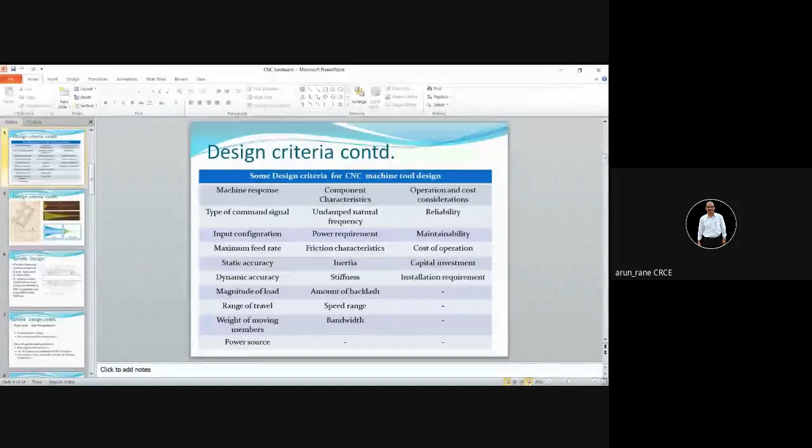So most of the parameters you are aware of, like what is your budget, that is capital investment, reliability, then maintainability - whatever you design should be maintainable. So these are the few parameters which are to be considered when designing a CNC machine tool.

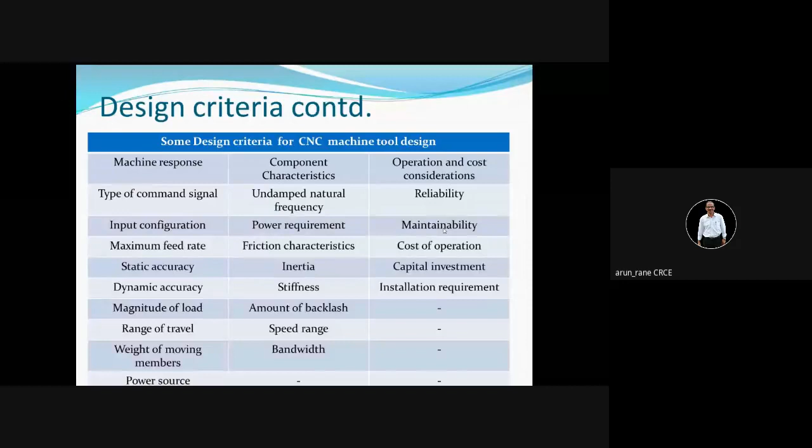Why do we incline the bed? First, it offers good rigidity to the machine tool, and second, disposal of the chips and coolant - they get disposed of very easily. The CNC lathe we have in our college is inclined. Usually the angle of inclination is 30 degrees to the vertical.

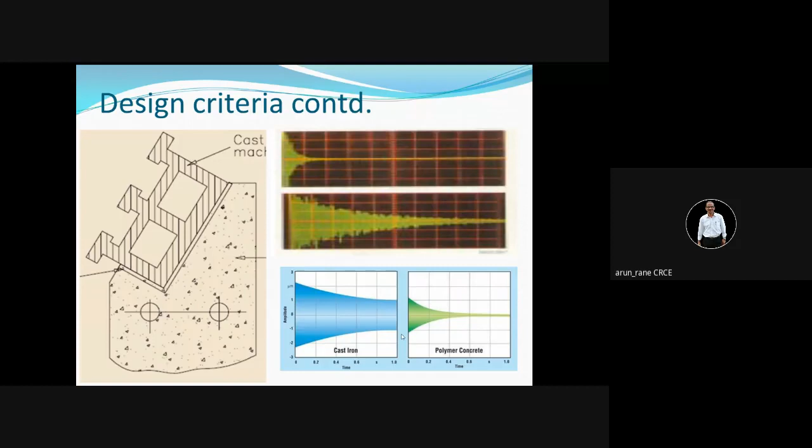Spindle is most important in any CNC machine design, because on the spindle we are holding a component or a job. So the spindle should transmit torque as well as power properly so that the component can be cut easily. Of course, there should not be any vibrations or chatters on the workpiece.

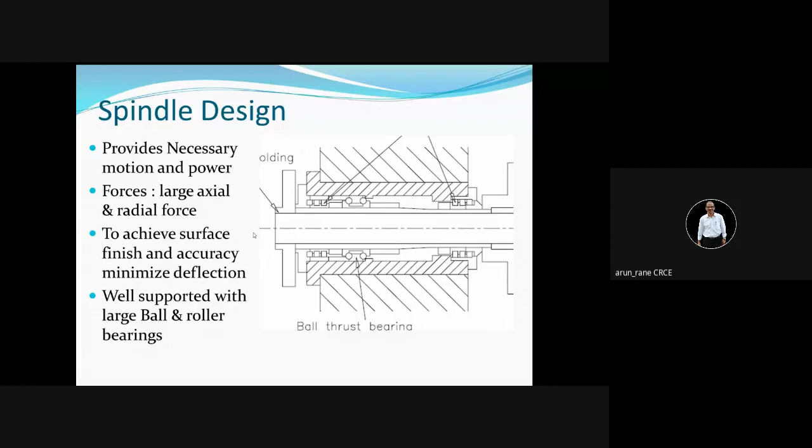If the speeds are very high on the machines, say 10,000 or 15,000 RPM, then a lot of heat is generated. So you have to design, considering all the design parameters, your machine in such a way that heat has to be dissipated. There has to be a proper cooling arrangement, either oil cooling or chilling.

Chilling means water cooling, so you need to have some chillers also outside your CNC machines. Even for oil cooling, you need a chilling unit. So whenever you are purchasing, as a purchase engineer, you have to consider the cost of accessories also, not focus only on the CNC machine. Yes, the CNC machine contributes the major cost, but along with that you have to consider other factors also, like environmental conditions.

The cabin or room should be vibration proof, it should be air conditioned, there should be proper humidity control, then a chilling unit, then a conveying unit. All this has to be considered in the budget, and you have to give the proposal to the management, otherwise your boss may scold you.

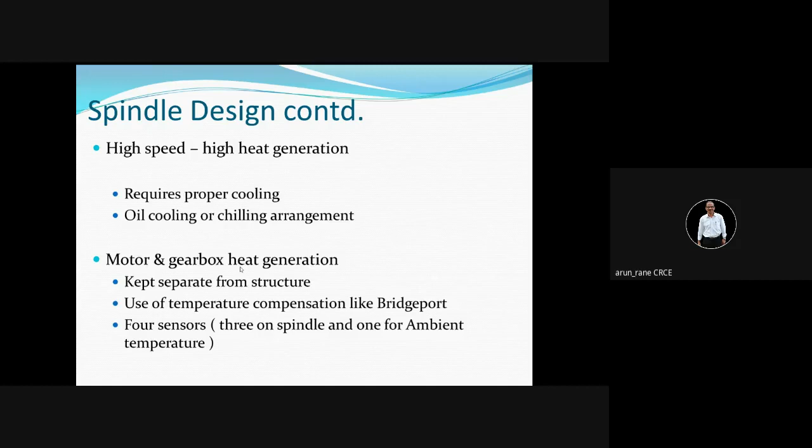Then your motor and gearbox also get heated. The machine we have in our college can reach up to 6,000 RPM. Nowadays, the machines available can reach up to 12,000 or 15,000 RPM; we call these the high speed machines. So heat dissipation is very important.

You should have good quality bearings so that your spindle rotates true, meaning it is not moving eccentrically. If you put a plunger type dial indicator on this surface, it should show zero, or maximum deviation not more than 5 microns. Then only will you get an accuracy of 10 or 20 microns on the workpiece. If your spindle itself is running out, you cannot expect any accuracy on the workpiece.

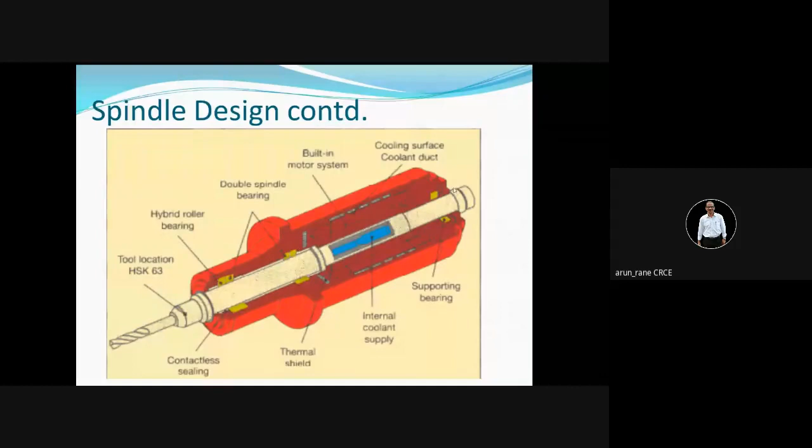This yellow color represents the bearings. Of course, you should have two bearings at the ends and one bearing in the middle. You can have an L frame construction as well as a C frame construction.

The design is not that easy. You have to consider how to cast it too; it should be designed for manufacture. Anybody can design, but it should not be so complicated that it cannot be manufactured at all - that design is of no use. So whatever you design should be designed for manufacturing, designed for assembly, and designed to cost, meaning it should have minimum cost. Then ease of assembly, ease of manufacturing, ease of maintainability.

From a maintenance point of view, your design should be maintenance free, like earlier bearings. I remember we used to receive open kind of bearings, so every 10 days or every week we needed to open the machine and put grease inside the bearing. But nowadays bearings are received in sealed condition, and the bearing manufacturers use good quality grease, put it inside the bearing, and seal it with end shields from both sides - now it is maintenance free, you don't have to put grease.

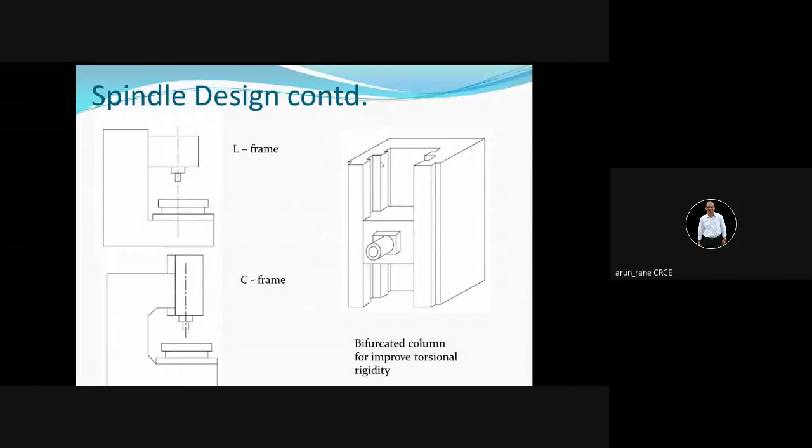There are two types of drives used in CNC machines. One is spindle drive and another is feed drive. The purpose of spindle drive is to give torque to the spindle or the workpiece. In case of lathe, the spindle is rotating. In case of milling, the tool is rotating. So spindle drive means you are rotating your spindle, and the other drive is feed drive, that is axis movement - x-axis, y-axis, and z-axis.

So what are the considerations in spindle drive? Obviously, material removal rate has to be more. Then speed - the beauty of CNC machine is the speeds are infinitely variable. We call it PIV, that is positive infinitely variable.

So in case of CNC machines, you have speeds ranging from 0 to 12,000. Suppose if 12,000 RPM is the capacity, then you can get any speed in between, like suppose 500.23. So any decimal point you can get it. It's not necessary that you will get only integer value.

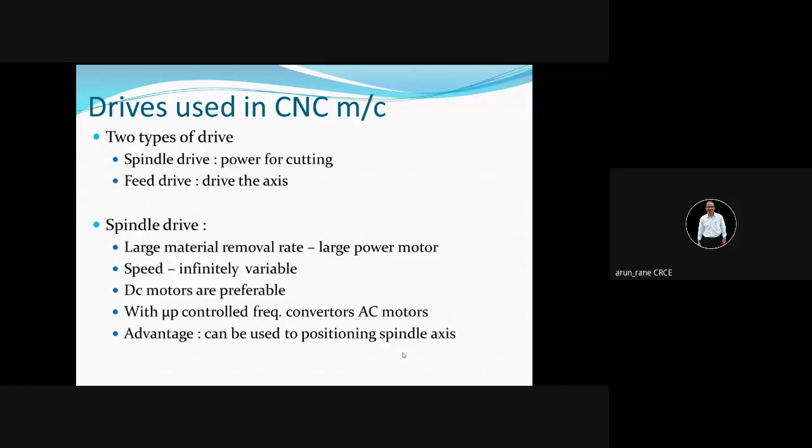So again, different kinds of hardware are used, like DC servo motors, brushless DC servo motors. Like I told you, in AC motors, nowadays it is available without brush. So even DC servo motors are available brushless, and every servo motor has its own advantages.

Like DC servo motors have high performance, useful in prime movers. Prime mover means it gives motion on its own. The response is better, meaning quick response. This is what you study in control engineering.

There is feedback. Like suppose if I want to apply a brake, then you should have an immediate response. The braking distance should be as less as possible, otherwise it is going to hit the person. Suppose all of a sudden a person is crossing the road and you have to stop the car immediately - so the response should be very fast.

Like suppose if a teacher is asking a question, then you should respond in as less time as possible.

Then the advantages of DC servo motors, brushless DC servo motors - heat dissipation and motor inertia reduce, that is the weight of the motor is less. So we call it weight to speed ratio. This is the beauty of design, or the work of design engineering. Earlier we used to go for stepper motors.

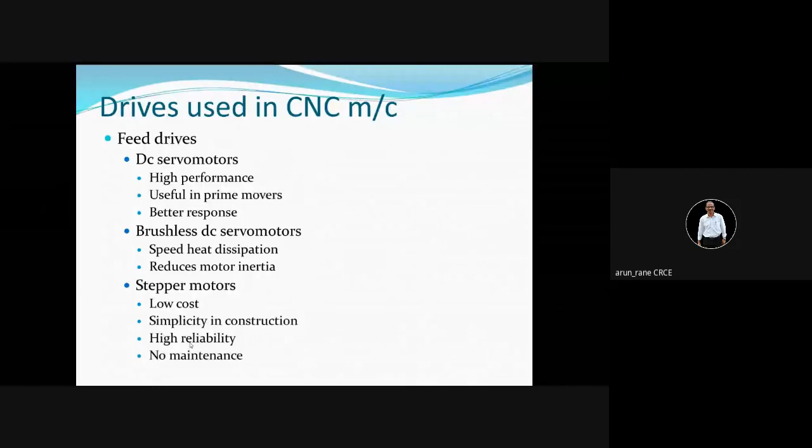My spindle should rotate through 0.05 degree, into 60 that will give you minutes, into again 60 that will give you seconds. So the technology is talking about rotation of the spindle not only through degrees or minutes, but through seconds, which is not possible by stepper motors. So we have to go for servo motors - there is no option. But if you want a low cost solution, then stepper motor is the best.

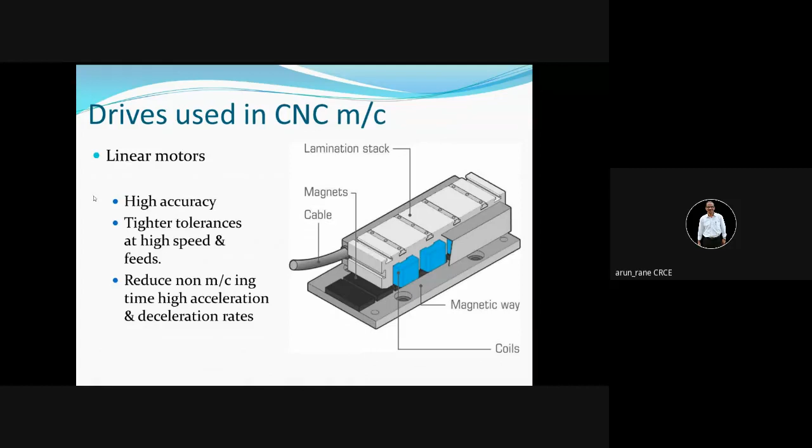Now you may be knowing that motors always mean rotary motion. Not so - you can have linear motors also. Linear motors means the output will be reciprocating. You give electric supply through the cable, and the output side will be a reciprocating motion. That is what linear motors mean.

What are the actuation systems? Actuation system means the motions - what are the hardwares or devices used for getting motions? One is lead screw. Now in case of CNC, we don't use the term lead screw, we use ball screw, because in ball screw you have zero friction.

Slideways - we use linear motion guideways. Linear motion guideways means the slideways, which are the guideways on which your linear or longitudinal movements occur. These slideways are coated with Turcite, a kind of polymer which gives you zero friction. So this offers a stick-free phenomenon - no sticking - with the help of Turcite coatings.

So in case of ball screws, your conventional square threads and acme threads are replaced with a special kind of thread profile in which you have balls, fitted and preloaded, so you get zero friction.

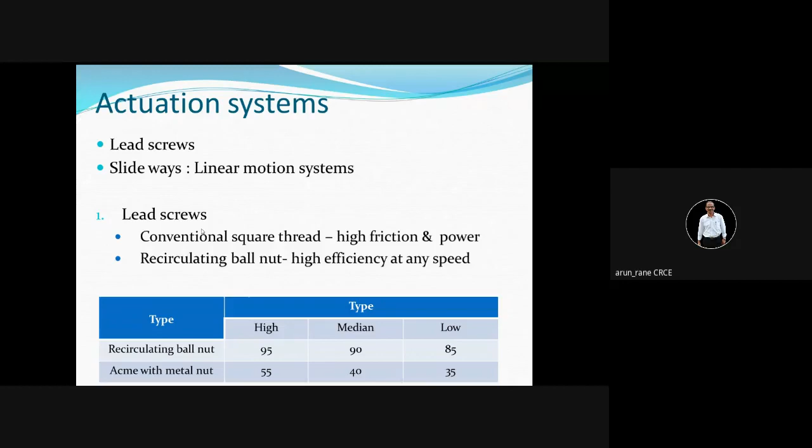How do you do that? Preloading - you apply a force from outside so that the clearance is reduced. If you apply more force, the clearance will be less; still more force, even less. There has to be very little clearance. You cannot have zero clearance, because if there is zero clearance, there will not be any movement at all. So there has to be a very small clearance.

At the same time, you have to see that the clearance is not too much either. If the clearance is much, there will be a play, dugu dugu, and you will not get proper movement or proper positioning. This preloading is factory set - there are special machines, SPMs, for preloading. So before dispatch, they preload the system, that is screw and nut, inspect, take the cuts, and then only dispatch. Generally, we don't do this preloading in house.

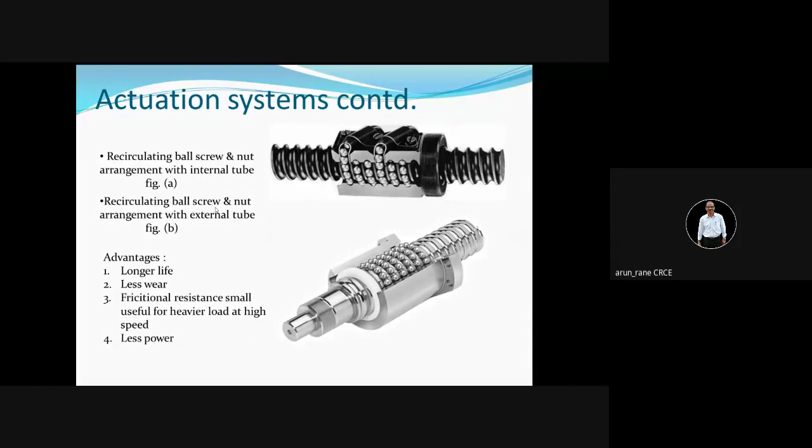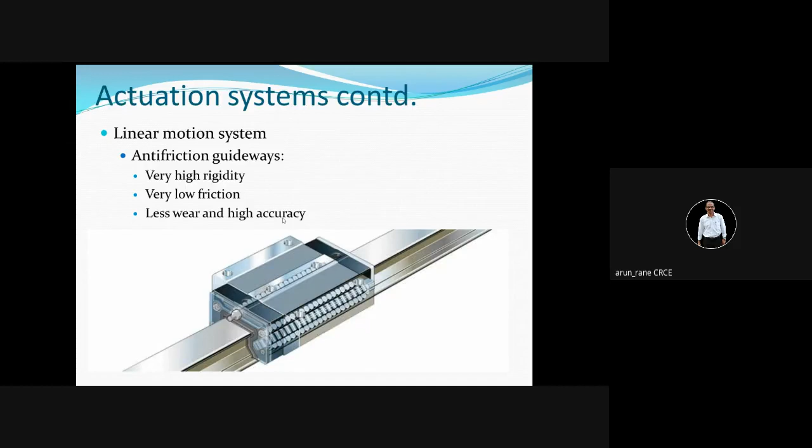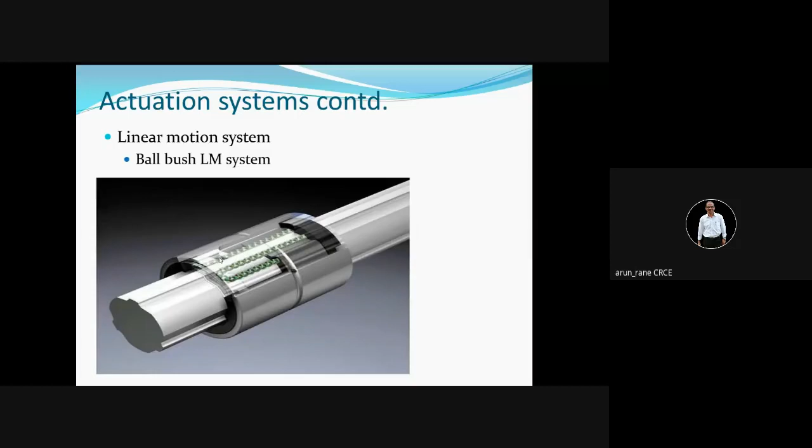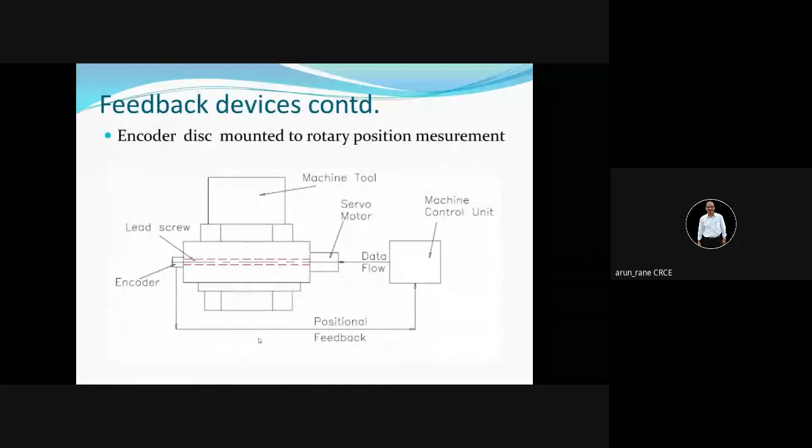Again the same diagram, the previous diagram and this diagram, the encoder is shown here. That's the only difference. But you can draw this diagram in your exam, very simple. And if required, you can draw this diagram also.

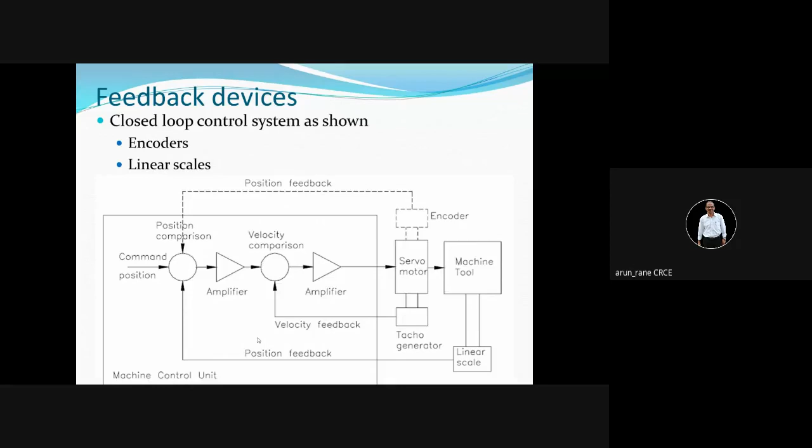There are some more feedback devices like scanning, but we don't use this. These are purely based on interferometer technology. Most of the CNCs, I will say 100% of CNCs, use encoders or tacho generators.

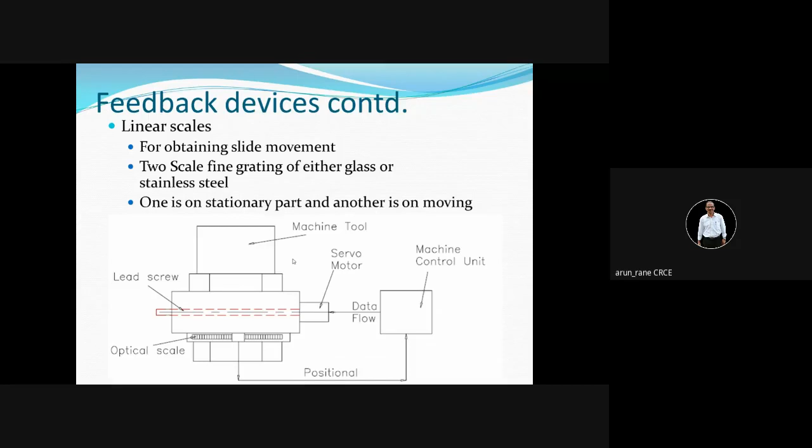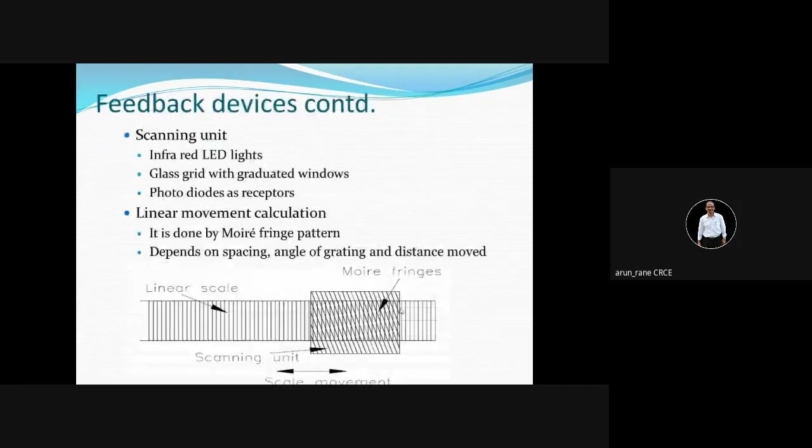If you want, you can refer to this book, P N Rao. Any doubts, please feel free to ask.

Yeah, Sachin. Indrajit. Hello, Indrajit, are you there or not? Yes sir. Any doubt? No doubt sir. None. Sure, yes sir.

Can you see this slide? Hello, Indrajit, can you see this slide? No sir, no, no. Yeah, now, yes sir, Indrajit, yeah, can you read it? CNC Hardware. Good, it is visible, no? Clearly, yeah, yes sir.

So just a continuation, I again uploaded this in the classroom because the weightage for this CNC hardware is 5 marks. So either they will ask on the structure, or on the spindle, or on the encoder, or ball screw. 4 to 5 hardwares you have to study.

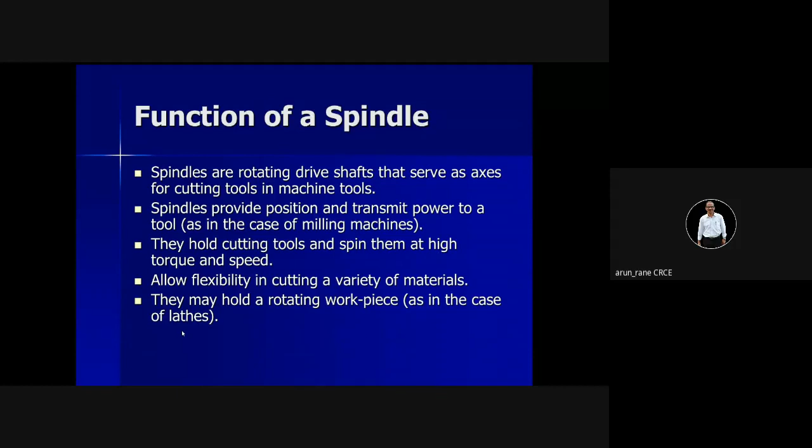So the principle is that it should give good power, should give good torque, should be durable, and you should get good quality, that is, we are talking about 1 micron or half a micron accuracy.

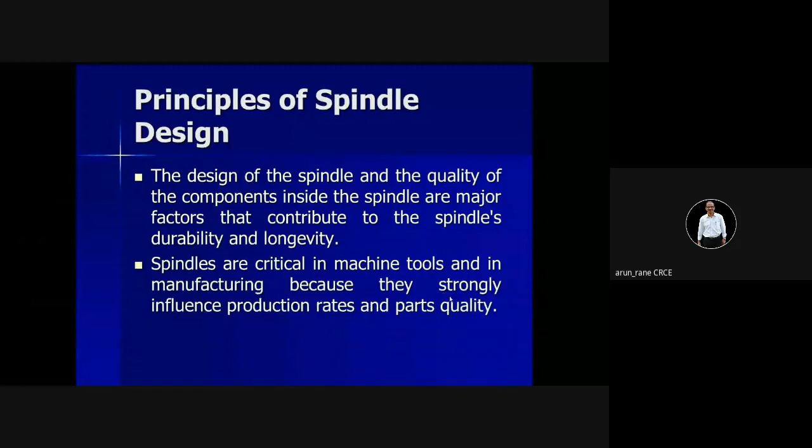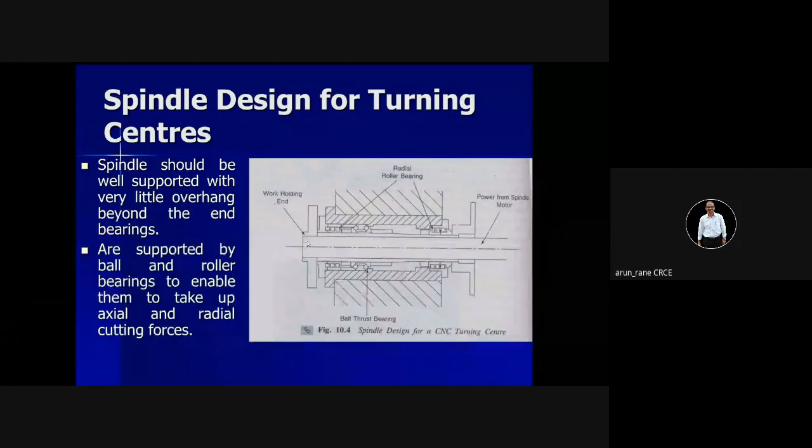HMC stands for horizontal machining center. The difference between machining center and milling is that in milling there is no tool magazine, the number of tools which can be held is only one. Whereas in case of machining center, you have a tool magazine which can hold 20, 40, up to 120 tools. Normally a 40 tool magazine is common in most machining centers.

Machining centers can be horizontal or vertical. Vertical machining center means like your vertical milling machine, where the spindle is vertical. Horizontal machining center means the spindle is horizontal.

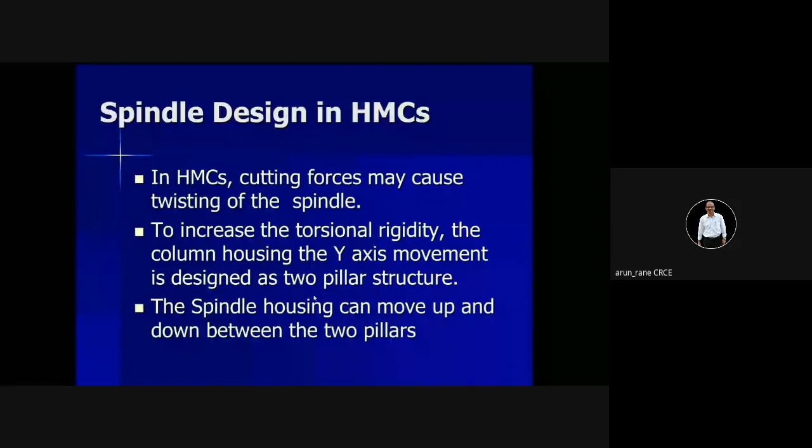See, a two pillar structure will give you good rigidity. If the machine is vibrating, that means it's gone, you will not get any accuracy. Again, if you want to avoid deflection in case of a vertical machining center, then you have to go for a C type construction, which I showed you in the last PPT.

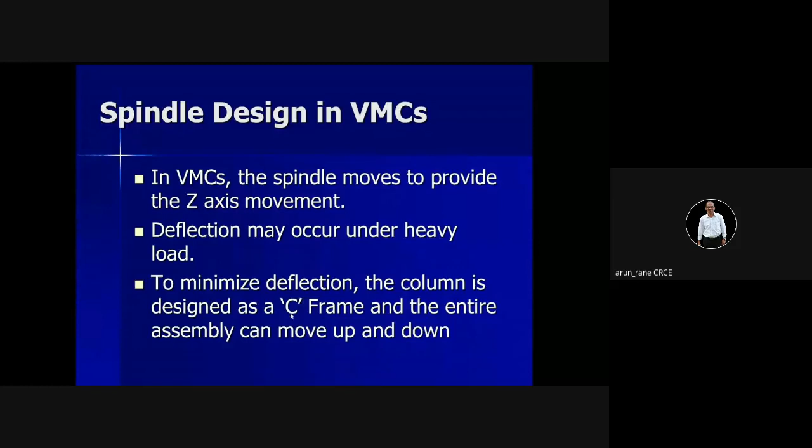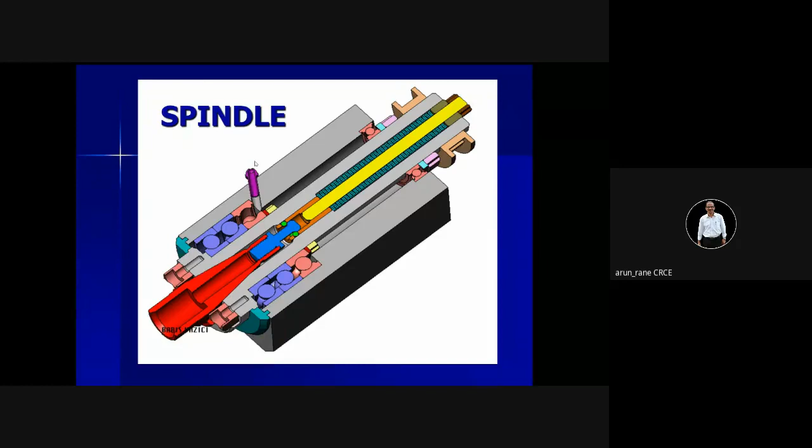So you have to see that chips and coolant don't go inside the spindle. Otherwise it will spoil the spindle. The chips will cut the shields of the bearing and damage the bearing. Once the bearings are damaged, then your spindle will run eccentric or run out. And once the spindle is out, you have to replace the spindle, or the machine accuracy is gone.

Same thing with coolant. If the coolant is going inside the spindle, then for a period this coolant will have a corrosive action on the spindle, so your spindle will get corroded from the inside and again accuracy is lost. So you have to have an air purging system, wipers, a good pressurized system, and a lubrication system. All these are the functions of a CNC design engineer.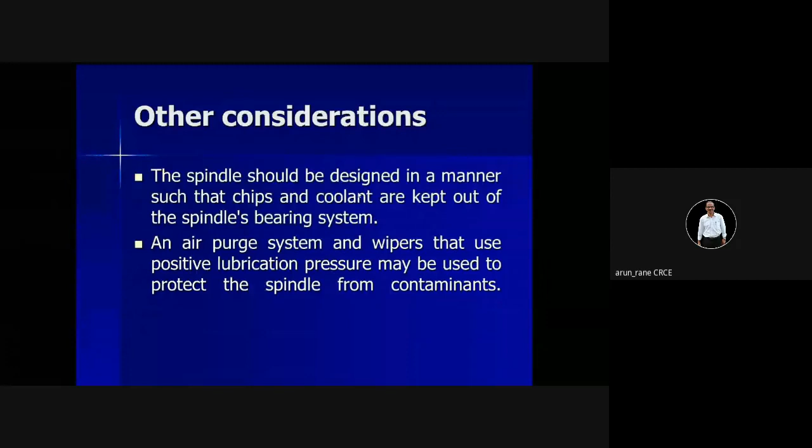Spindles can be classified as belt driven, gear driven, motorized or integral motor - meaning the spindles are directly connected to the motor - and high frequency spindles. Generally here, that is gear driven spindles.

99% of CNCs have gear driven spindles because belts will have slip, will not have proper or good torque, and will not transmit power properly. The only advantage of belt is if the distance between the motor and the spindle is more, then belts are preferable.

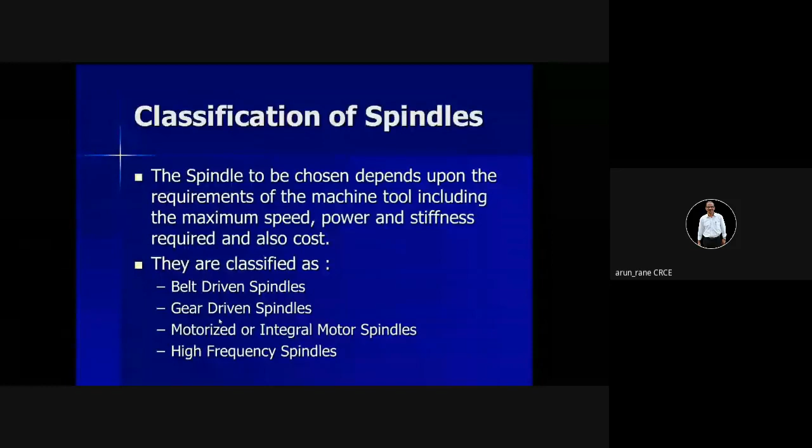But nowadays we maintain the distance in such a way that spindles can be driven by gear, and gears are positively driven - good torque, no slip, good power, etc.

These are some advantages and disadvantages. It is less expensive. Power and rotations can be given with the help of an external motor, meaning the motor can be situated outside. Like I was talking about the slip of the belt, which can be overcome with the help of a cogged belt.

Cogged means having teeth on the belt. Those who are working on the projects must have used this cogged belt. The belt has teeth from the inner side, and the pulley it's mounted on also has teeth. It looks like a gear, but not exactly, because the depth is less. Or you can have V belts also, two V belts or three V belts. Cogged belts are preferred, but definitely in terms of speed, power and torque, geared drive is always preferred.

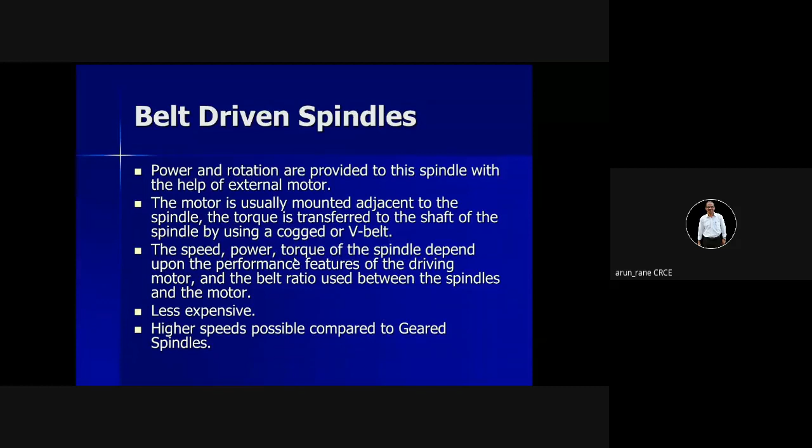Gear drive can give you good, high torque. It is also useful for low speed operations. It is desirable, gives good rigidity, speed variations, and so on.

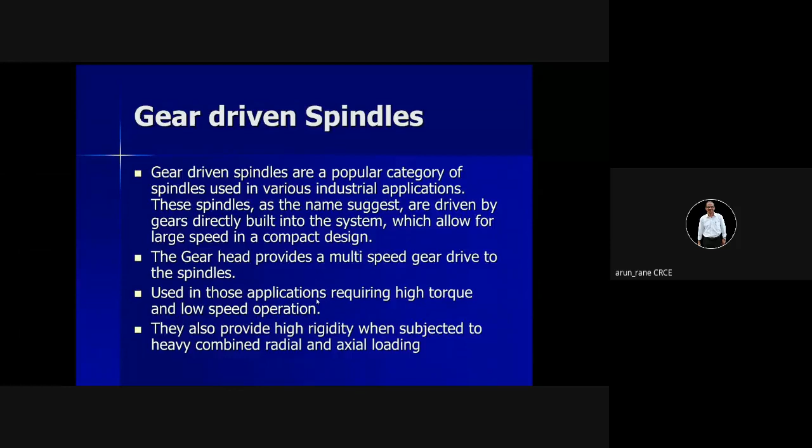Integral spindle motor - like here we have a motor, and the drive is transmitted through the belts to the pulley, and this is your spindle. In case of an integral spindle motor, your spindle is directly mounted on the motor. So there is no transmission loss, very compact, but this design can be used only up to low power applications, maybe up to 2 HP or 3 HP.

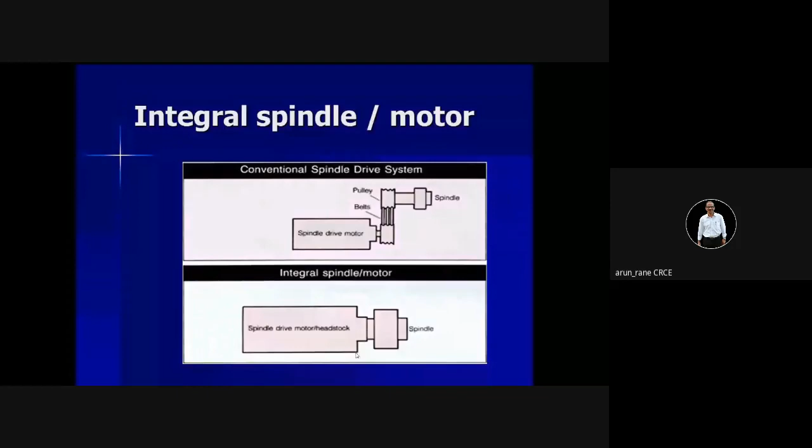So if you want high material removal rates, integral spindle motor design is not applicable. Of course the design is also complicated. From an academic point of view, you can definitely study it if you are curious academically. From an examination point of view, it is not important.

Your spindle is directly mounted inside the motor - that is your integral spindle, or your motor output shaft is designed in such a way that your chuck, that is chuck, or your faceplate can be directly mounted on the motor output shaft in a simple way. This is what your integral spindle means.

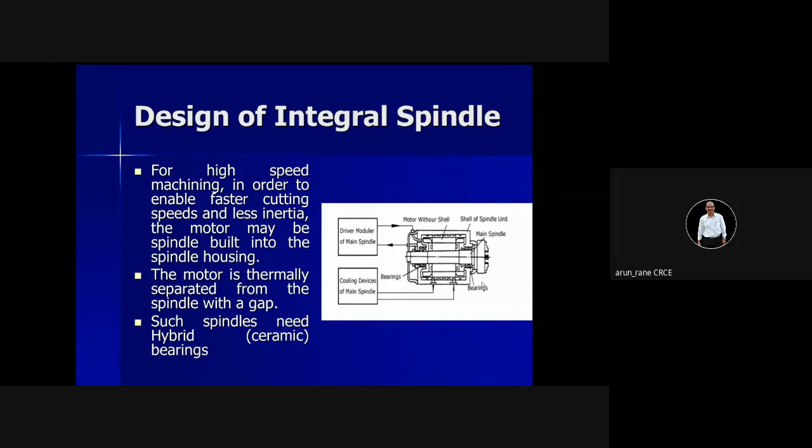High frequency spindles are very common in terms of precision, higher speed, and productivity. Not only that, you also get good surface finish and closer tolerances.

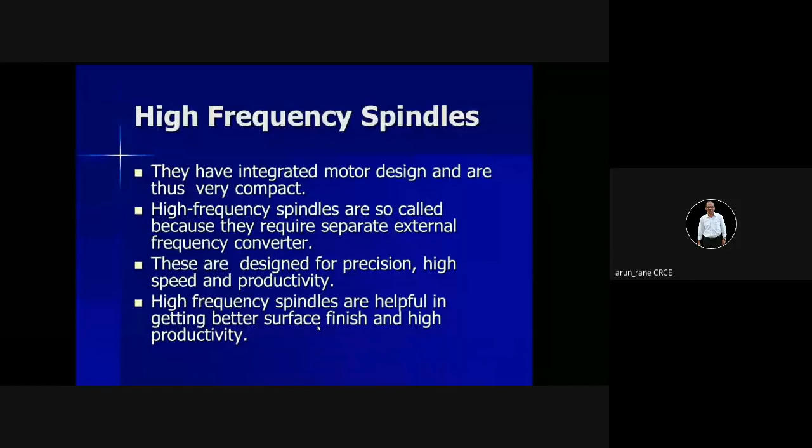As I have been telling again and again, in CNCs the spindle drives, or axis drives, are also called PIV, that is positive infinitely variable. You get any speed in terms of decimals, and that is only possible because of these DC servo motors.

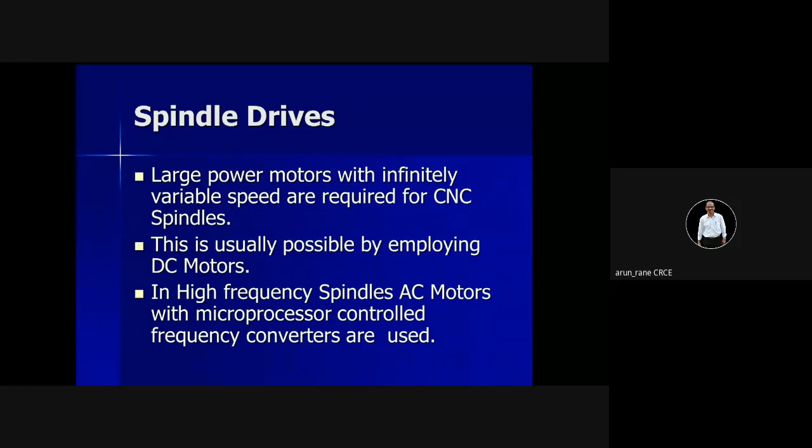In the last presentation we saw that you have to maintain the spindle temperature, so there has to be a good cooling arrangement. At the same time, regarding adaptive control we were talking about, they have a temperature compensation system. So the temperature compensation system means if the temperature of the spindle increases, then it compensates for that rise in temperature. That is what your temperature compensation system is.

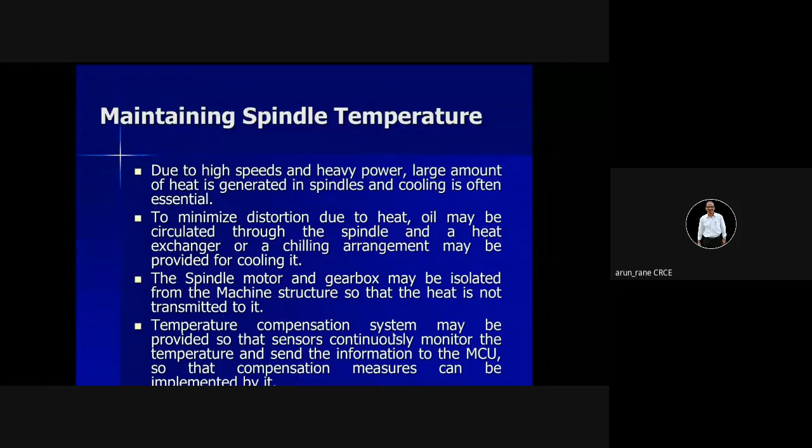So you have different parameters for choosing the spindle: power, load—what is axial load, what is radial load—size, weight, torque, etc.

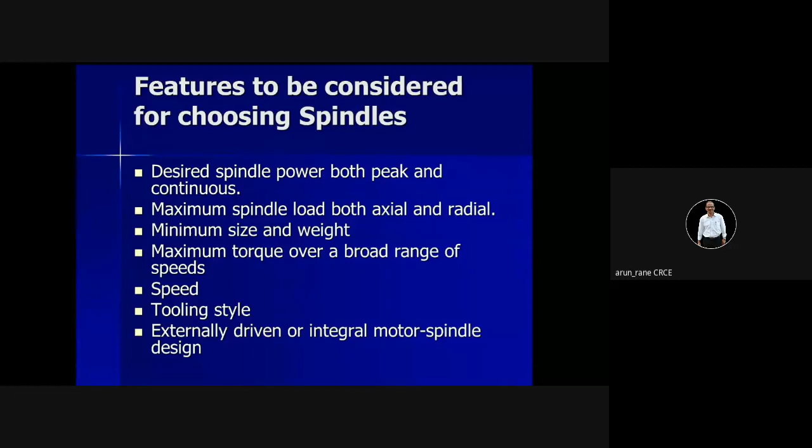To go a little fast because we have to complete this. Then axis drives—it can be spindle drive or axis drive. So clearly it will be asked in the question: describe spindle drive or describe axis drive.

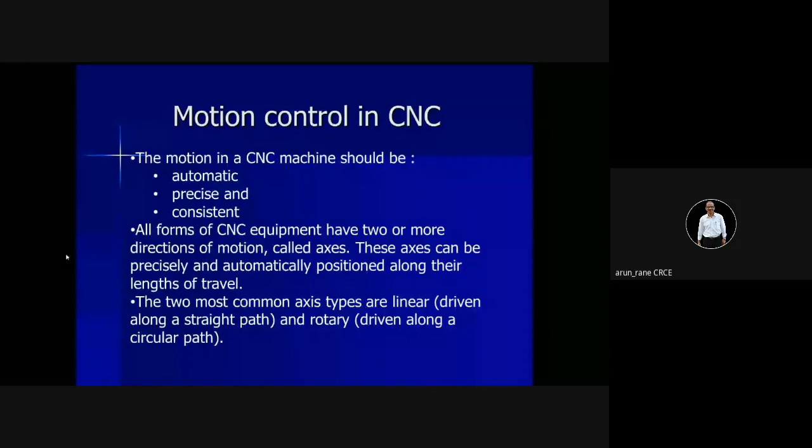So the motion in a CNC can be automatic. It has to be precise and consistent. Precise means it has to stop at that point, and consistent means repeatability—that it should repeat the same position every cycle or continuously, not only once or twice. So repeatability, consistency, or uniformity is very important in motion control.

So you have motors, ball screw, encoders, linear scales, and tacho generator—this is what we have seen already. Never talk about lead screw in CNCs; you have to always speak about ball screw. No lead screw, no rack, no pinion—only ball screw, encoders, and linear scales.

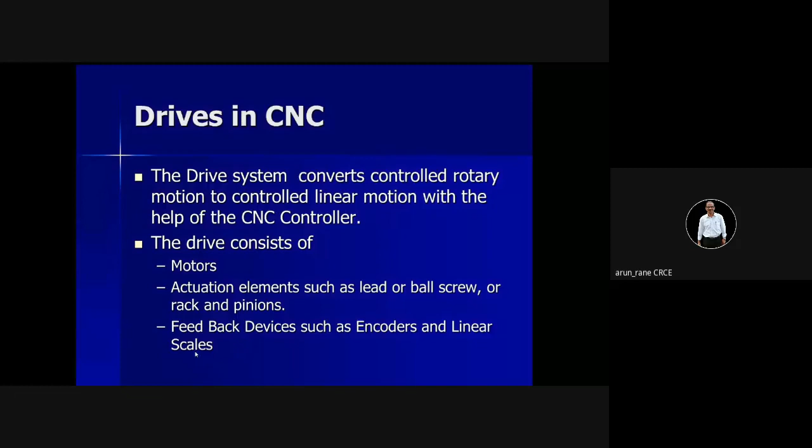Rani: Sir, let us conclude. Can we conclude, sir? Speak loudly, I cannot hear you. Yeah, just give me 2 minutes, 2 or 3 minutes. Fine? Okay, thank you, sir. Just hold on.

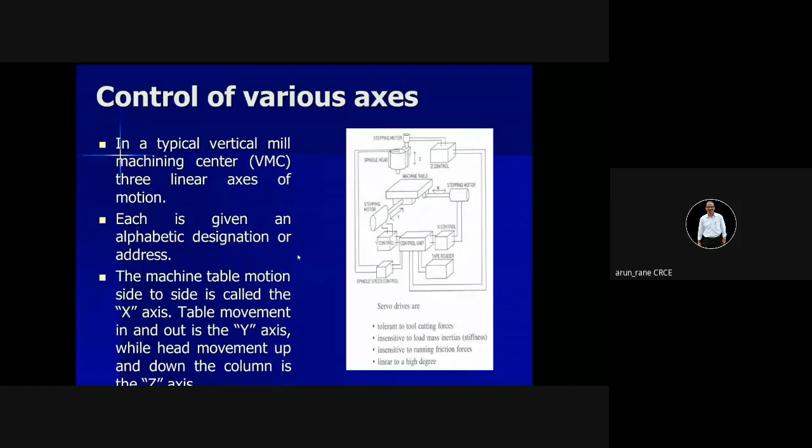You can go through this also, I'll just touch upon it. So you have movements in x-axis, y-axis, and z-axis—that is what is called control of various axes. This I have explained in the last presentation. Additional axis can be the rotary axis. So we have machines up to 7 axes.

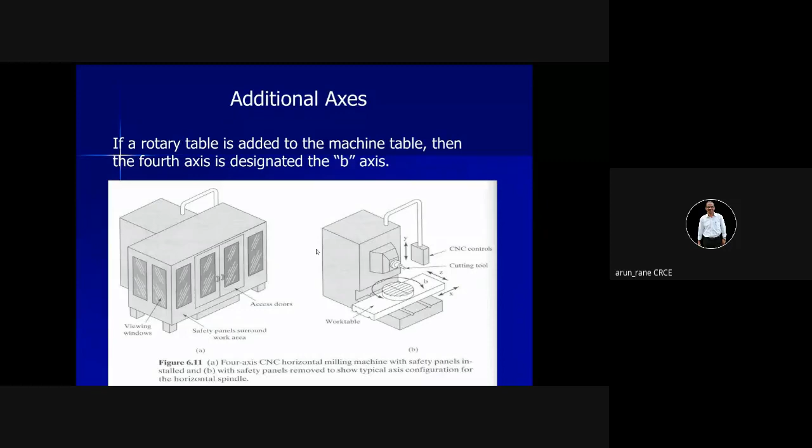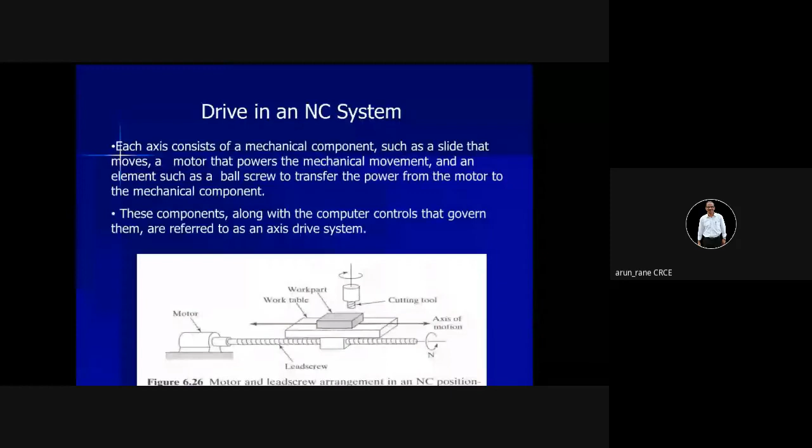And open and closed loops. This is your closed loop. In closed loop, the feedback is given like this, and in open loop there is no feedback. Open loop machines are less costly; closed loop machines are costlier.

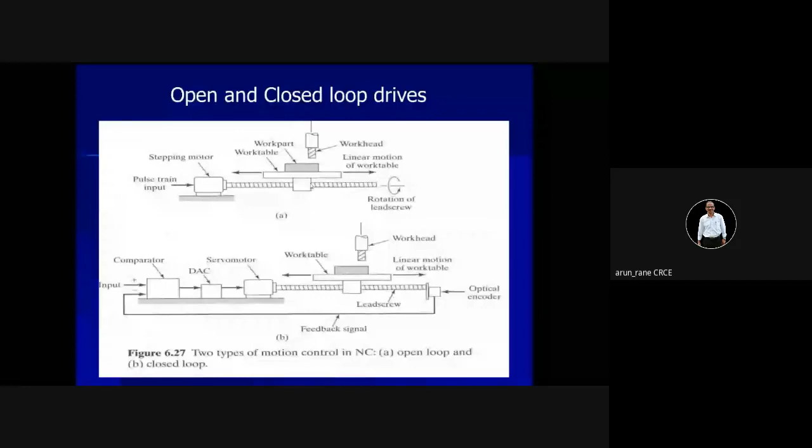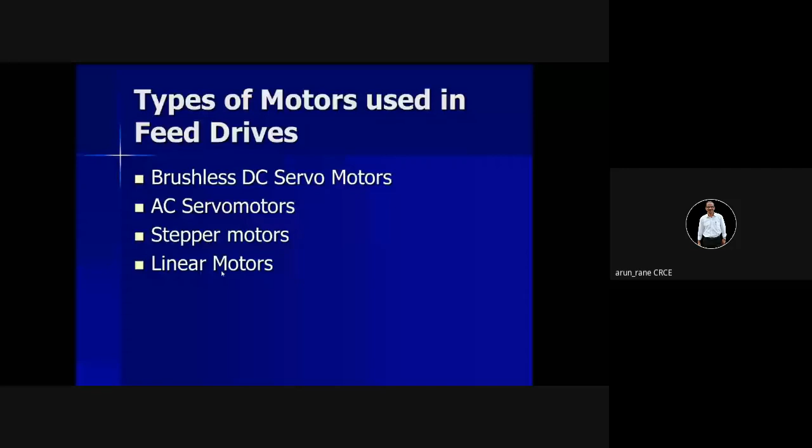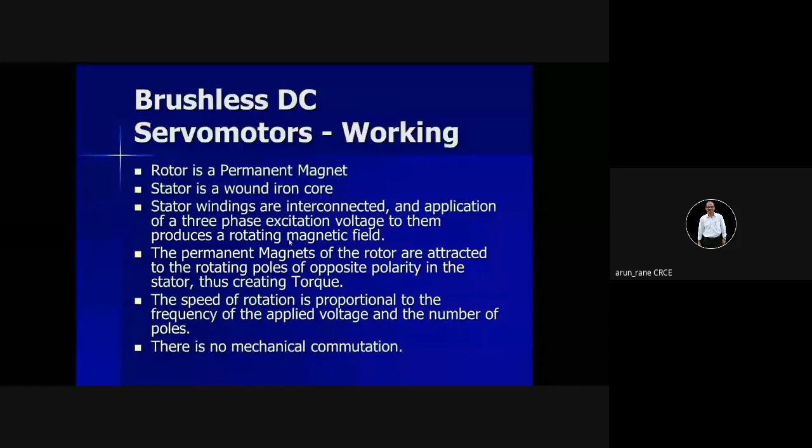Similarly, different types of motors are used for feed drives—brushless, AC, stepper, and linear motors, which we have discussed. Go through this; I have given a jump start so that you can understand this. It's not that difficult. I also explained what is a stepper motor, what is a servo motor.

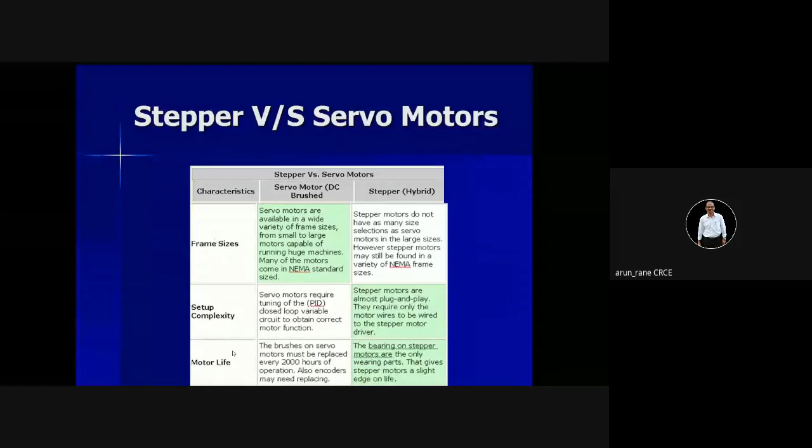Servo motor means good positioning; it will work pulse by pulse. You have been given the comparison of servo motors and stepper motors also—this is important from your examination point of view. The comparison is in terms of cost, versatility, reliability. Servo motors are always better in terms of size, complexity, life, torque, repeatability, and safety has advantage. Stepper motors are economical.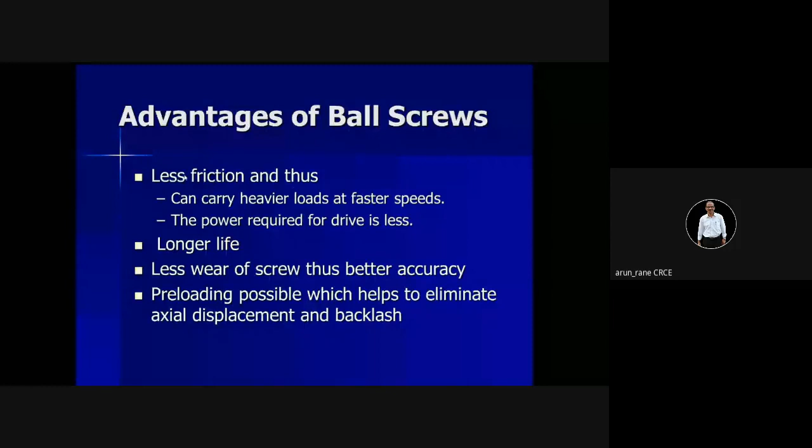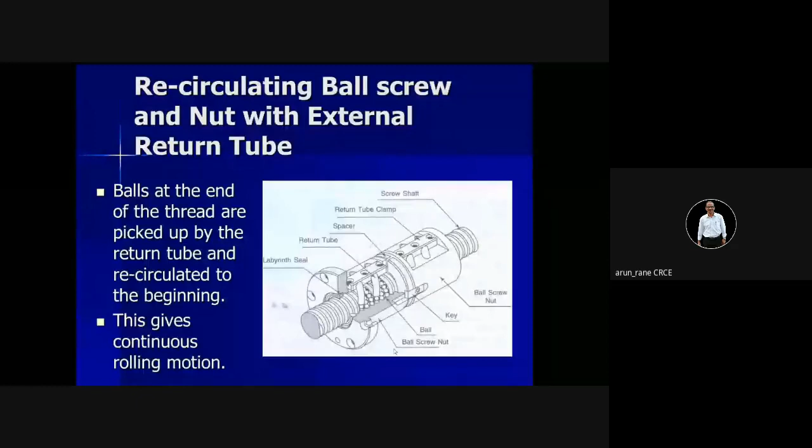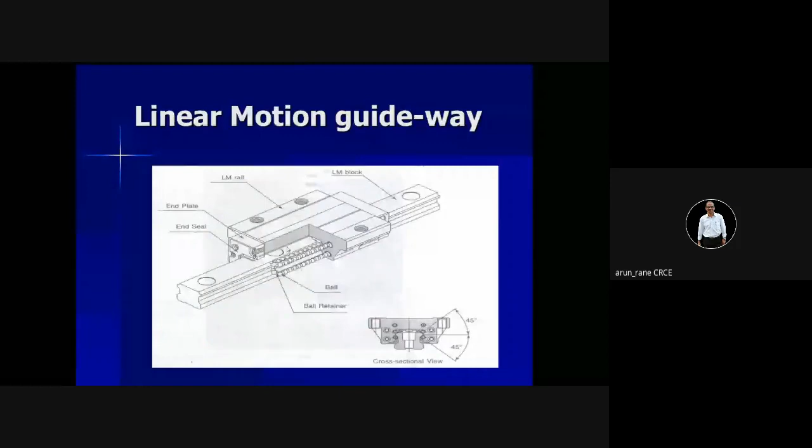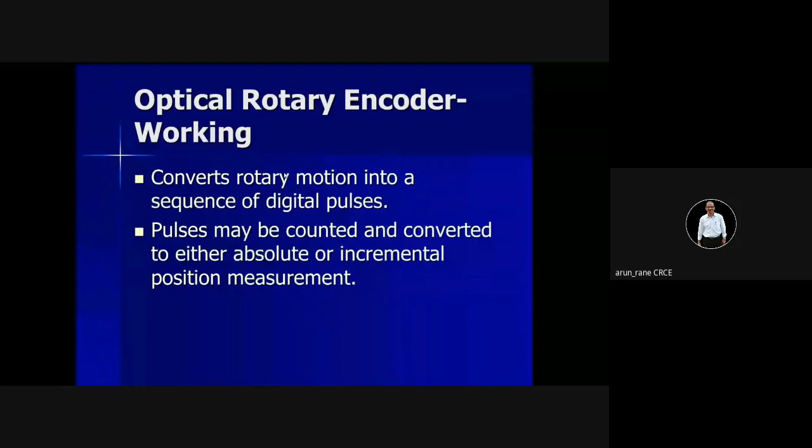You have balls—this is recirculating, that is the balls are moving continuously. Then linear motion guideways, that is reciprocating movement of the beds, we discussed already, and feedback devices also—encoders and tacho generators we have discussed. Encoders are of two types: absolute and incremental types. But you can only talk about absolute encoder for study. If you want, you can study the difference between absolute and incremental encoders.

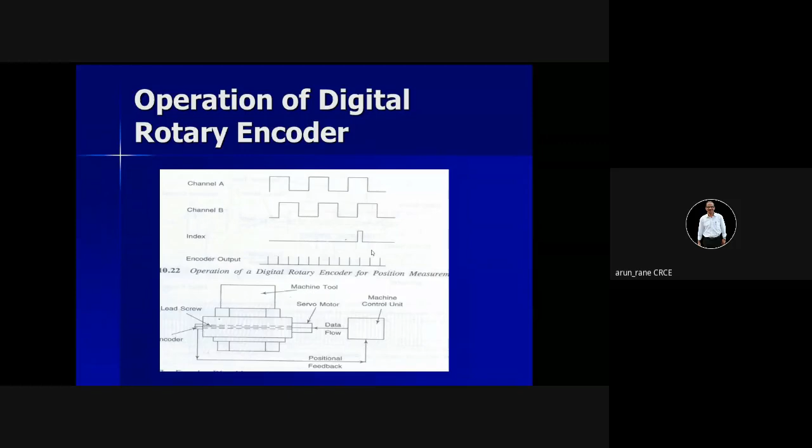Thank you very much. So I'll summarize—today we studied hardware, that is structure, ball screw, encoders, tacho generators, linear scales, and what are the design criteria. Then there are two types of encoders, rotary encoders being incremental and absolute. This is what we studied.

Yeah, please, Niraj. Sir, we have a break now, can we conclude, please? No, I'm just summarizing, and you can take your leave. So what I was telling, can you hear, Niraj? Yeah, I was just summarizing that we studied ball screws, encoders, tacho generators, servo motors, stepper motors, and structure in the hardwares. If you have any doubt, you can ask; otherwise we can stop it.

Nothing in the chat box. Thank you, sir. Any doubts, Indrajit? No, sir. Neither do you have any doubts? Thank you, you will go for breakfast, sir. All right, okay, you may leave. Thank you, sir. Most welcome.